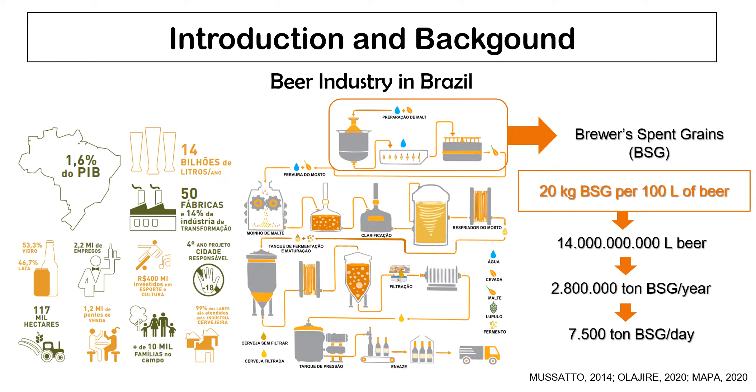Also, the brewer's byproduct, the brewer spent grain, is a lignocellulosic biomass composed of 71%, but also presents a high amount of protein, approximately 20%, and also bioactive compounds and fatty acids, which demonstrates that it is a suitable feedstock for industrial application.

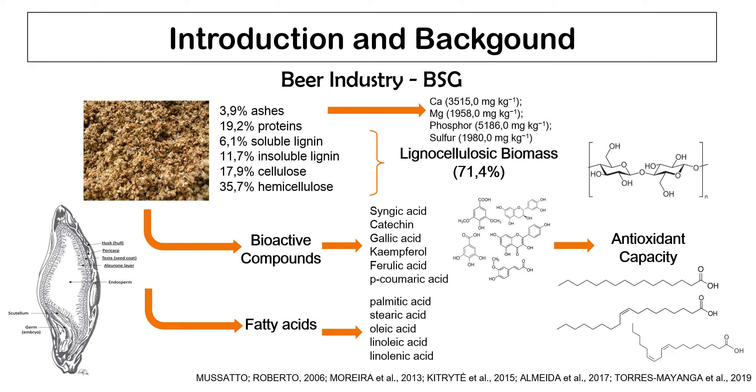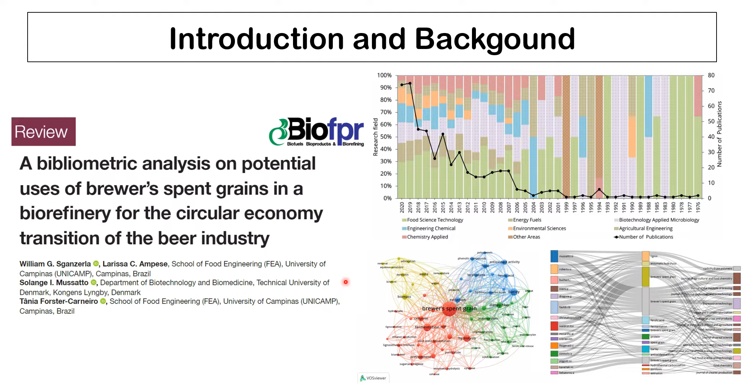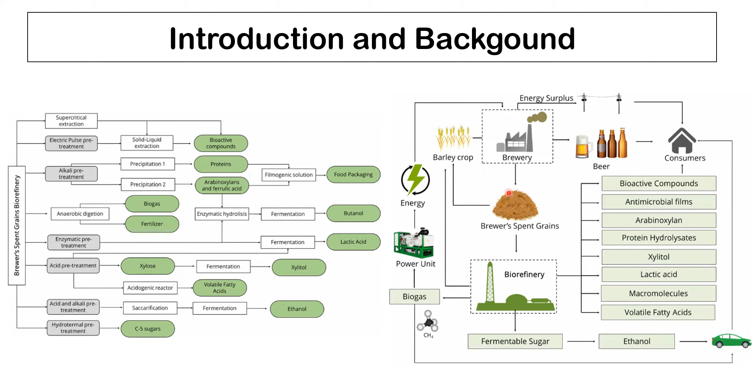So we developed a bibliometric analysis, a review study, which analyzed the potential uses of brewer spent grain in a biorefinery for the circular economy transition of the beer industry. We analyzed the trends and the most promising results, and highlighted during the study was the possibility to apply the brewer spent grain in a biorefinery to produce a range of compounds such as proteins, biogas, xylose, ethanol, sugars, and volatile fatty acids, using brewer spent grain as feedstock in this biorefinery.

Since we are working with a lignocellulosic biomass, it's necessary to study the pretreatment of this biomass. And pretreatment is the most important stage of the industrial process for further processes, for example, the fermentation. Well, conventional pretreatments in general, such as those based on chemical, alkali, and enzymatic hydrolysis, present high operational costs, generate toxic residues since it's necessary to apply chemicals in this process, and therefore result in a non-profitable process.

However, using and studying subcritical water hydrolysis, we can affirm that this pretreatment is an eco-friendly alternative when compared to the conventional pretreatment, since we generate bioproducts just based on the use of water. And since we are producing value-added products with high marketable price, we can generate a profitable process.

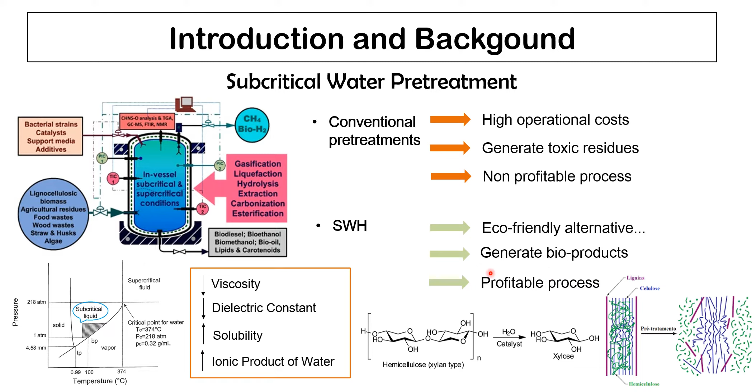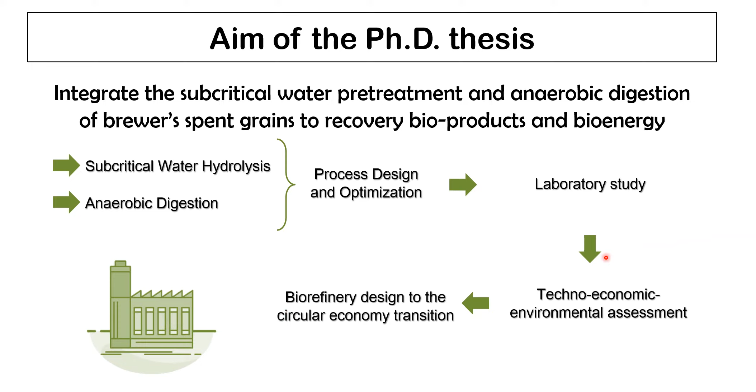So based on this fact, the aim of this PhD thesis is to integrate the subcritical water pretreatment and anaerobic digestion of brewer spent grain to recover bioproducts and bioenergy. So we will study both technologies, we will design the process and optimize the parameters, firstly in laboratory studies, for further technical, economic, and environmental assessment. And the goal of this thesis is to design a novel biorefinery for the circular economy transition of the beer industry.

So the first step is to study the subcritical water hydrolysis of brewer spent grain. We conducted in our laboratory a novel process based on sequential subcritical hydrolysis. So it's a process composed of 2 reactors. Here we can see the process flow sheet. We optimized this process, all the operational conditions, and then we submitted this process, and we have a patent of this process.

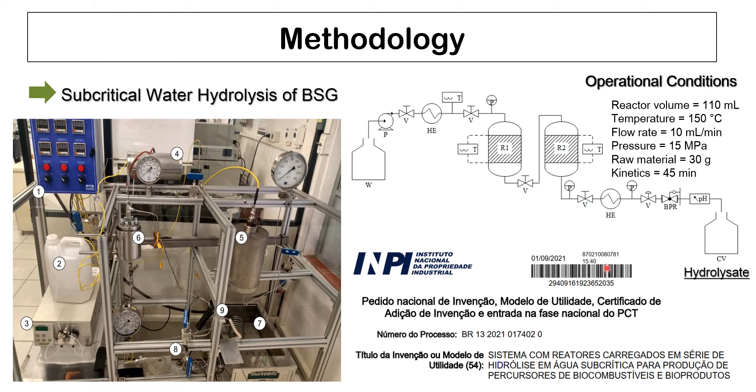Then in this process we produced a hydrolysate, and this hydrolysate we used for anaerobic digestion, which is our experiment integrating both technologies. We conducted the first reactor just with brewer spent grain, and the second one we used brewer spent grain and the hydrolysate for anaerobic digestion. The first reactor is a dry AD, a dry type of digestion, since it contains approximately 20% of total volatile solids, and the second reactor is a wet digestion, since it contains less than 2% of volatile solids in the initial composition of the reactor.

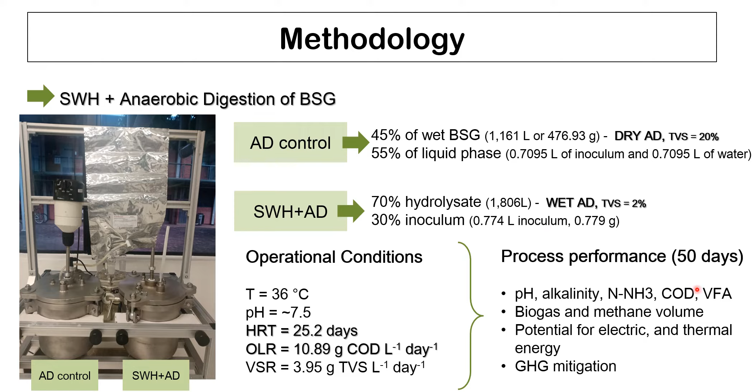We used these operational conditions aiming to produce a high amount of methane, and we evaluated the process performance of both reactors during 50 days. Our experimental results obtained from the subcritical pretreatment: in general, this is a picture of the color of our hydrolysate during the kinetic points, and after our process, we observed that we can produce a high amount of arabinose and xylose as the majority sugars, and also we can produce a high amount of organic acids, especially citric and acetic acids.

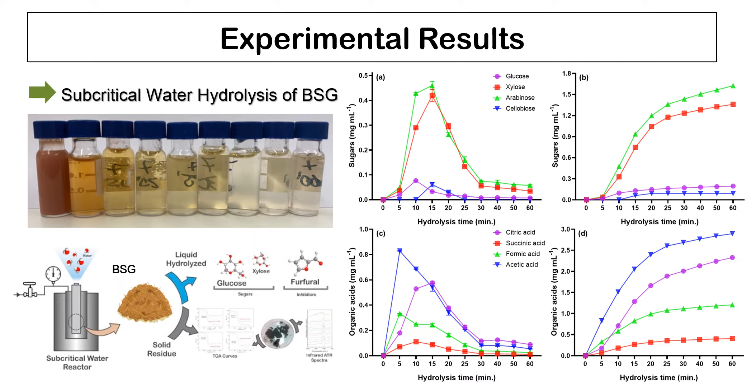Using the hydrolysate for anaerobic digestion, we highlighted that approximately 72% of methane is produced for the AD control without pretreatment. And using a pretreatment, we obtained 82% of methane after 29 days of anaerobic digestion. That is, we foster a faster stabilization in our reactor with a high methane content, which is a positive result for an industrial application. Also, the methane yield for this process was higher for the pretreated reactor when compared to the reactor just with brewer spent grain.

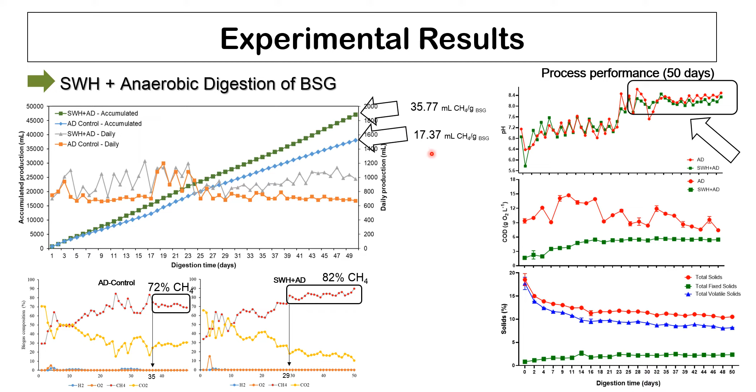The biogas produced and the high content of methane obtained in our reactor can be submitted to a combined heat and power unit to produce electricity and heat. We can assume a lower calorific value for methane, and knowing the percentage of methane and the amount of biogas produced, we can estimate a renewable production of electricity and heat from this biogas. And also we can calculate the avoided GHG emissions for this process, considering that we will replace electricity from the grid, and we will replace natural gas from the boiler, since we can use the heat.

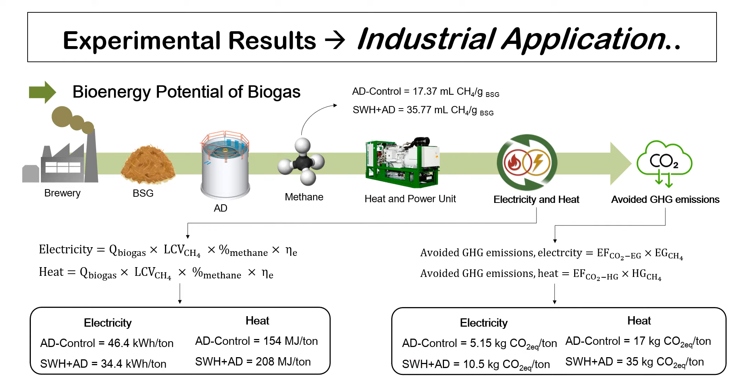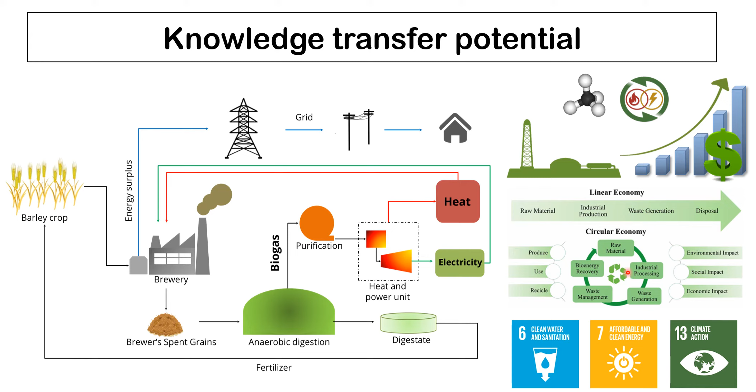The knowledge transfer potential of this PhD thesis is based on the implementation of anaerobic digestion in breweries for the production of biogas and digestate. The digestate can be upgraded to fertilizer, recovering nitrogen, phosphorus, and potassium, and this fertilizer can be used in the barley crop, avoiding the use of petroleum-based fertilizer. Also, the biogas can be used to produce heat and electricity, and this bioenergy can be used in the brewery during the industrial process, and the energy surplus can be sold to the grid, meeting the circular economy definition, since we are using a raw material to recover bioenergy.

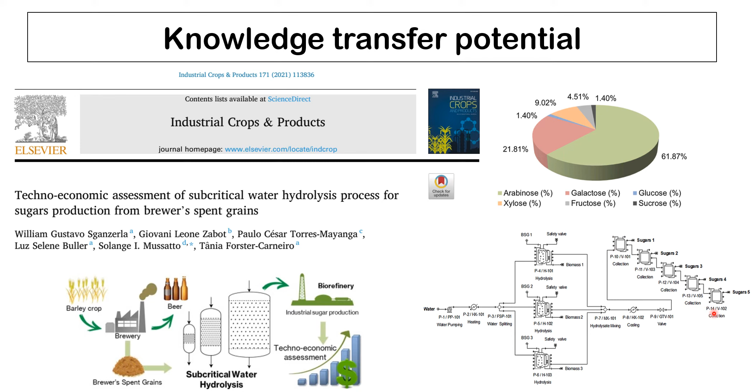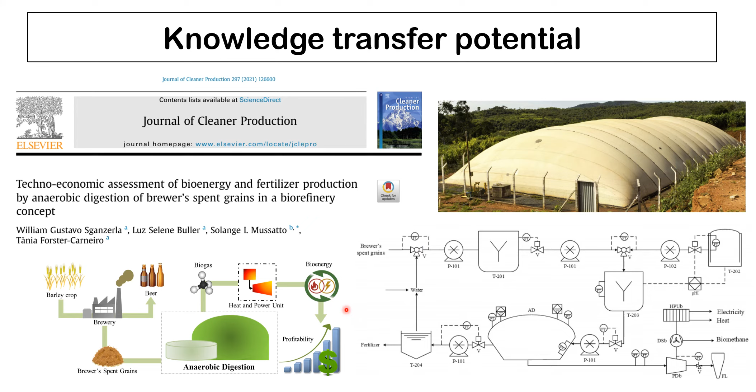Beyond this PhD thesis, we published 3 papers. The first one is the review paper, which I mentioned in the introduction. The second one is the techno-economic study of subcritical water hydrolysis for the production of isolated and purified sugars, which we published in Industrial Crops and Products. And our third paper is a techno-economic study regarding the production of bioenergy and fertilizer from anaerobic digestion of brewer's spent grain, without pretreatment, just the dry anaerobic digestion.

Finally, we have 2 patents. The first one is the patent of our pretreatment with sequential subcritical hydrolysis, and the second patent is regarding the anaerobic digestion process, in which we developed a novel process based on 2 reactors, a batch and a continuous reactor, for brewer's spent grain.

This thesis has a direct contribution to the Sustainable Development Goals, especially the goal clean water and sanitation, since we are treating a residue and generating clean water. Also, since we are producing bioenergy and using this bioenergy, and the surplus can be sold to the grid, we meet affordable and clean energy. And finally, since we are mitigating greenhouse gases by using a more renewable energy source, we also meet the 13th Sustainable Development Goal, climate action.

So finally, using an eco-friendly pretreatment and a waste management system and integrating both technologies, we can treat these organic and lignocellulosic wastes from the beer industry and produce bioenergy and bioproducts. And this process can be a strategy to decrease the carbon footprint of the beer industry towards a sustainable transition to a circular economy.